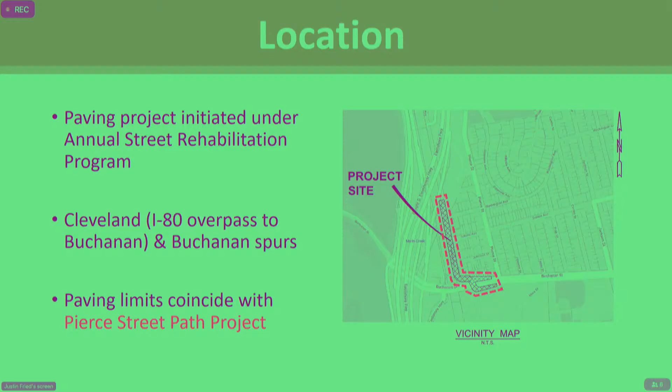In our active transportation plan, the Pierce Street Path was our highest priority, priority 0 project. The first segment, to the north or left on this slide, was constructed soon after completion of the plan.

Pierce Street Path Segment 2 continues along where the current path terminates, either along Pierce or through some Caltrans-owned right-of-way, through the parcel of land owned by the city that has Pierce Street Park in it, and then comes down to where the SAHA housing project, Verona Hill, constructed a segment last year, joining at Cleveland Avenue, where this project looks at continuing that connection down to the Buchanan Bikeway.

So it's all part of this Segment 2. It's been delivered opportunistically in these different segments.

This commission recommended we seek grant funding, and we have some planning and early design funding that was awarded to the city for the Pierce Cleveland Bikeway Connection project. That work will be kicking off shortly, and we'll be starting discussions around that with the commission.

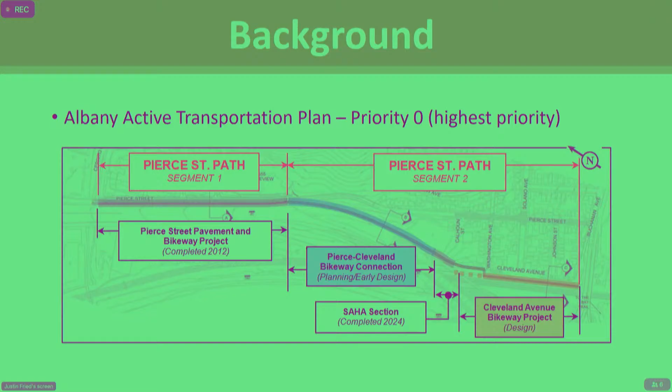This project is further along. This is the design phase and is programmed for construction.

So the meshing of these two projects together has happened in various ways, or these types of projects together have happened in various ways.

As I mentioned earlier, the annual street rehabilitation program really focuses on street condition. It's not intended to be an enhancement or building of new facilities, major enhancements, and building of new facilities. So outside of the required ADA curb ramps and safety measures needed to maintain the existing street...

The funding for new facilities really does need to find outside sources of funding, whether that's outside the program or outside the city. So, as Justin mentioned, we've had various grant programs that we've been looking for funding for, and we're happy to say that we have...

$515K that we received from Alameda CTC earlier this year, intended for construction of the bikeway components of the project. This is to supplement the annual street rehabilitation program, and it's actually developed as a separate CIP project in our recent CIP update, in order for us to track the two projects together or separately, but ultimately they're getting delivered under one construction project.

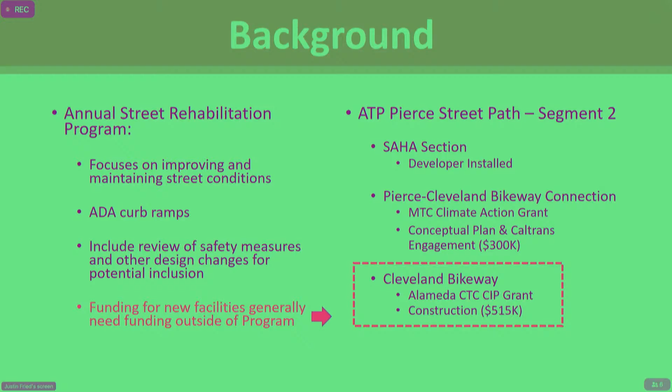So before diving into the project details, let's talk through our schedule on this project. For tonight, we're looking to finalize comments on draft plans. Often we come to you with slightly more developed plans, but it's been a few years, and we wanted to make sure we had a chance to run through everything. This is the first time we're showing detailed plans; I think the last time was more of a conceptual design of the bikeway specifically.

The reason we're doing this tonight is we usually end up spending a few different iterations, and we really wanted to see if, with this project, we could shorten that down, get all the comments at one time, and make sure it's complete.

We can vet through anything that comes in here before finalizing and sending it over to designers for detailed implementation. Right now, the plan is to return this coming summer for a recommendation to council, with hopefully council approving advertisement in the summer and fall, so we can start construction in winter of 2026.

This would mean it's following the Marin paving project, and we're trying to tie this closely so that we can continue to stay in a paving project of some sort, so we can keep up with our condition and pavement maintenance needs.

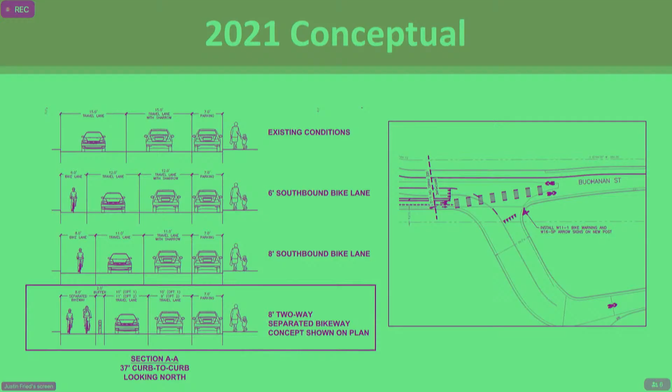Running quickly through some comments and follow-up items from the earlier conceptual discussion, there was a fair bit of discussion on the travel lane widths and the AC Transit service. At the time, the 80 route was suspended.

The route took from Pierce Street to Solano to Cleveland to get onto Buchanan. I think it was actually a holdover from before there was a signal at Pierce and Buchanan to navigate that left turn. Part of the discussion was maintaining an 11-foot width so that the 80 service could continue to run on that route.

With AC Transit realigned, the 80 was not reinstated. And as I mentioned, there is a signal now at Pierce and Buchanan, so if there was service brought back on Pierce needing to make the left onto Buchanan, presumably that would be an option. But at the end of it, it's really where the center line is, so it's not a huge project impact if there were changes down the road that need to be made to the lane widths. It doesn't really affect the rest of the design.

What you're seeing tonight maintains 10 feet in both directions, because we don't have the bus need, and we didn't have fire department support for going below 10 feet travel lane width, even in the northbound direction.

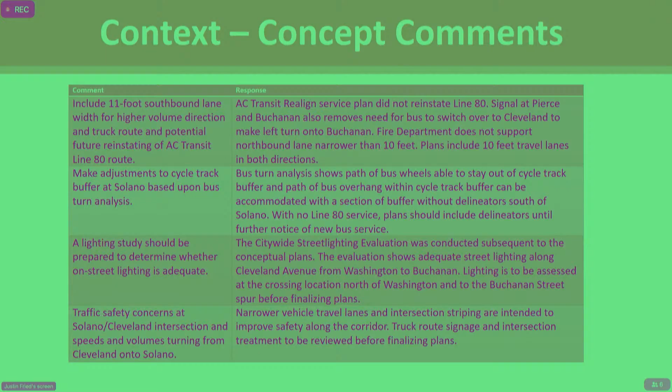All right, so I'm jumping in to provide a little bit more context on some of the civil design efforts that were identified coming out of the conceptual design process.

So the bikeway is located in what we call a major overland flow channel. It's taking significant overland flow from the side of Albany Hill, about a fifth of Albany Hill actually drains down through there. And so we wanted to make sure that the bikeway is usable even in wet weather.

Additionally, on the pedestrian sidewalks and ramps, we've had, with other projects, some drainage considerations that we wanted to implement here. So we took a look at all of these things, and what we're looking at is extending a storm drain up from the intersection of Cleveland and Buchanan, and bringing that through so we can take care of both an existing valley gutter that's going to make the curb ramp design very challenging along from Solano to Buchanan, as well as the bikeway. So some of that grant funding is supporting the bikeway components of the stormwater as well.

I think there's going to be a little bit more we can speak to a little later, but it really is trying to take care of the drainage. There's a visual. Thank you.

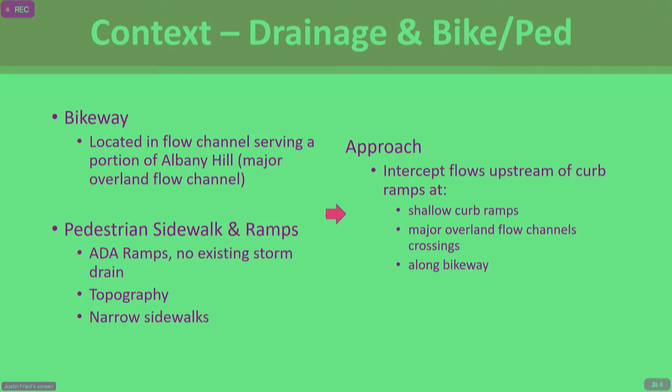So I think we're going to be diving into the current design. So the project as a whole right now includes paving, the bikeway improvements, RRFBs. These are kind of part of that bikeway design. We have curb ramps, storm drains, and striping and signage improvements.

Question: do you anticipate there being flooding? I mean, the water backing up when it goes into that inlet? That's always a maintenance concern.

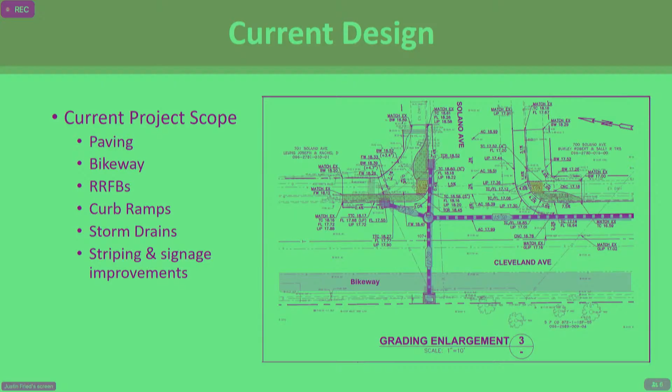So I'll run through a few of the elements in the design, and we can pull up the plans to go into greater detail for discussion.

The current design we're presenting, this is a cross section. It shows on the right-hand side, to the west, the 8-foot bikeway, 2-foot buffer, and then two 10-foot travel lanes and a 7-foot parking lane, and then the east side sidewalk zone, the sidewalk and planter strip. We're looking south here.

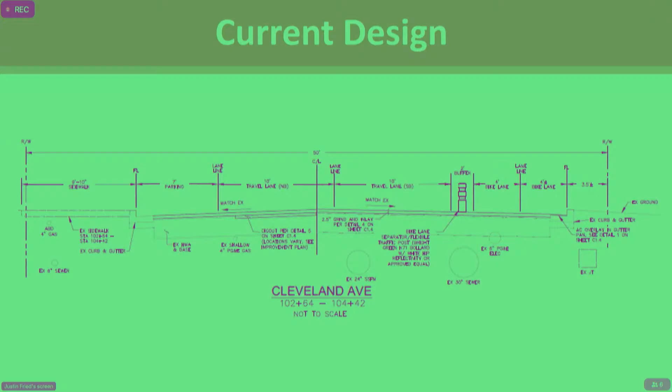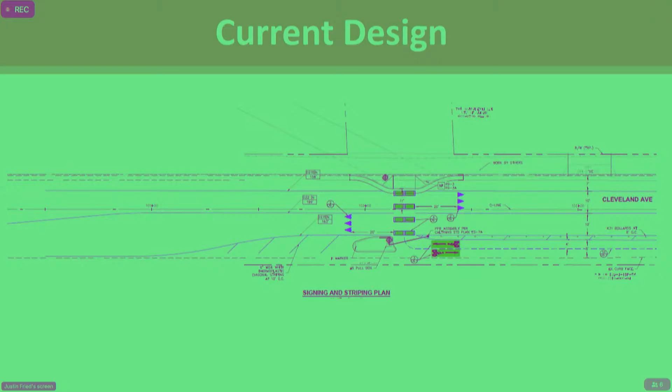And then just walking through some of the signing and striping plan pages. This is showing where the bikeway adjacent to Saha meets Cleveland. So we're looking at a curb extension and a physical island, raised curb island, as part of the lane shift for southbound vehicle traffic for the start of the bikeway, to really focus on slower speeds and attention to the crossing and making it as navigable a jog there for going from the path along the Saha property across and then into the bikeway adjacent to Cleveland here.

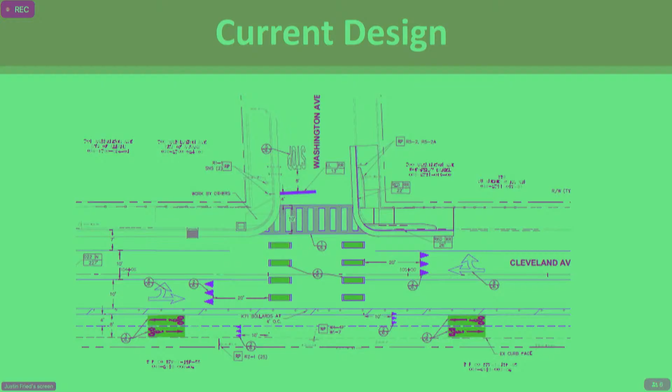And then as it comes to other cross streets, we're looking at facilitating entering and exiting the bikeway, as well as the curb ramp and pedestrian improvements adjacent to the paving. Similarly at Washington.

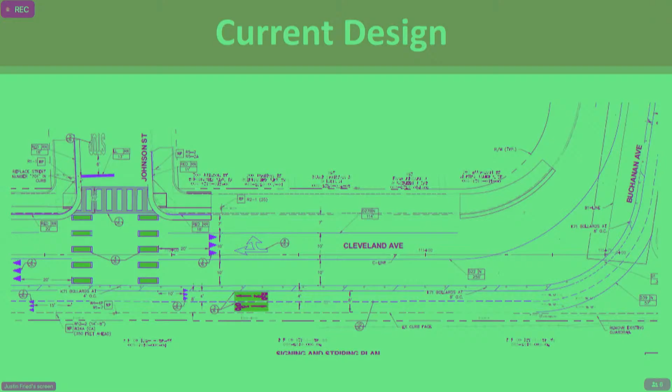Then south to Johnson Street, navigating the curve, and then here it needs to make the connection to where the Buchanan Bikeway crosses Pierce. There's access to the overcrossing, or crossing to continue east on the Buchanan Bikeway. East of here it's basically a dead end, low volume with just a few cars, but we occasionally get reports of folks not familiar with the change that was made, or not recognizing that isn't a street that continues. This is also showing a raised island that can be more prominent, since the main travel for southbound vehicles is really to continue under Buchanan, overcrossing to the signal, versus proceeding straight east here. With that, we can pull up the plans and speak to more specifics.

I don't know if you had anything else, Allison, before we open it up to questions from the commission. Yeah, I have a question.

On that same slide, did you guys consider putting a stop sign at, I guess, the northbound side of Buchanan Avenue, where the blue triangles currently are? Does that description make sense? Basically, where the truck traffic will be coming out. There's very little traffic coming north here, it's really just exit from the Department of Agriculture. It reads as a regular lane, but really that's the only folks that can exit there, serving one-way truck traffic southbound to East Buchanan Avenue. So we've been toying with ideas, and we're open to ideas on how to make sure it's a safe crossing.

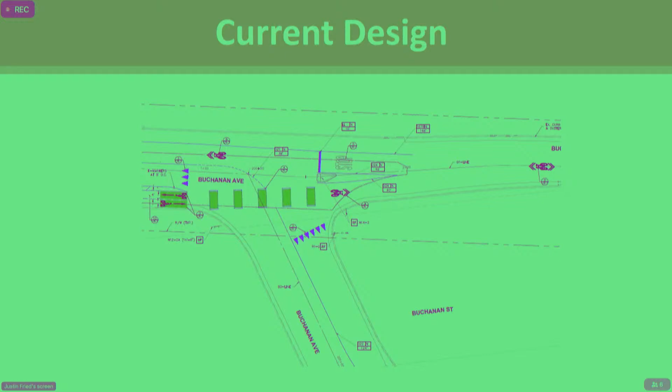I have a question on sheet C6.2, it's in your slideshow, showing the crossing at the north edge of the cycle track over to the property in front of Verana Hill, the low-income housing project. I'm wondering if that happens south of the garage or north of the garage? That happens north of the garage. North of the garage, okay, great. I looked at Street View, and it's still a grassy knoll. Oh, that sounds dangerous. There's nobody there.

I have a general question about the titling of things. This is described as a bikeway project, and there's some $0.5 million involved. Does that same amount of money apply for the pedestrian improvements, or is the bike funding exclusive to the bikeway?

So right now, the estimated project cost is about $1.5 million, and about $500,000, just over $500,000, was identified as related to the bikeway specifically. The pavement program, the annual street rehabilitation program, does incorporate ADA curb ramp improvements, and those are part of the paving program. They're required by ADA, and when we pave through intersections, we're required to make sure that the ramps are up to either the current standards, if they haven't been upgraded before, or if they've been updated in the past since passage of the ADA, that it met the ADA requirements at the time. Often those were less clear, so we often end up saying there's a better ramp that we can put out there.

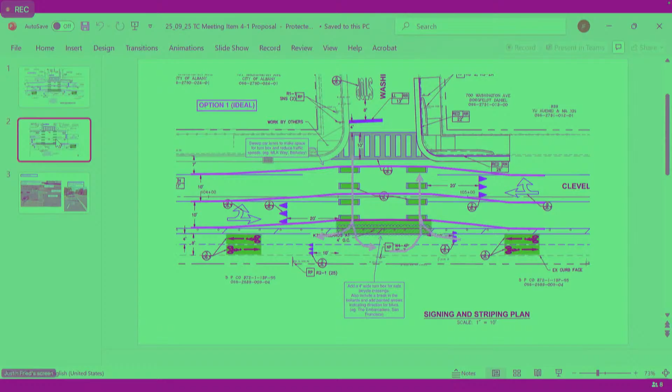Want to show the other images? Well, the other one was just in case no one took to the sweeping idea. It's less ideal because it's not as big of a turn lane and doesn't offer the benefits of traffic calming, but it's just kind of turning this section of the buffer zone into a mini turning shoulder kind of thing.

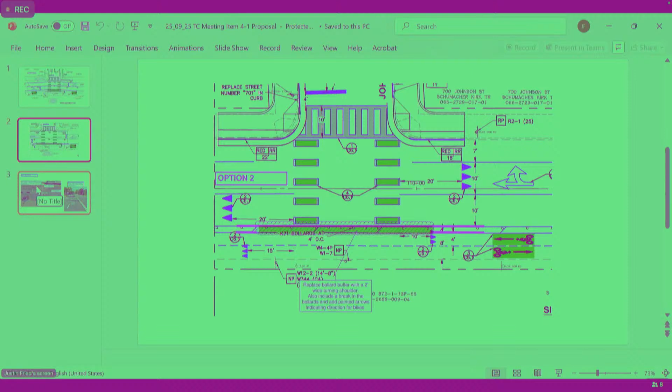And then these are just examples of where this is being done on the Embarcadero and Washington in San Francisco. We share the same cross street name, so that's a good sign. And then on the right is the sweeping on MLK in Berkeley.

So, Emma, do you mind speaking to some of the things she's brought up? I think we probably need some review. I did want to add one more thing about compliance around striping, because people tend to just drive right over striping rather than following it. Making sure that whatever improvements we're doing, is there room to make sure there's some kind of hardened element, or what we would need to ensure compliance with these kinds of lane movements.

Yeah, that's a great point. I did take a look at this before the meeting, and I do think it's a good idea. I would actually suggest reaching a little bit further and having a 6-foot wide turn box. I think we have the room to shift the striping over. But I do think this could be one potential idea we consider for navigating those right turns on and off the cycle track.

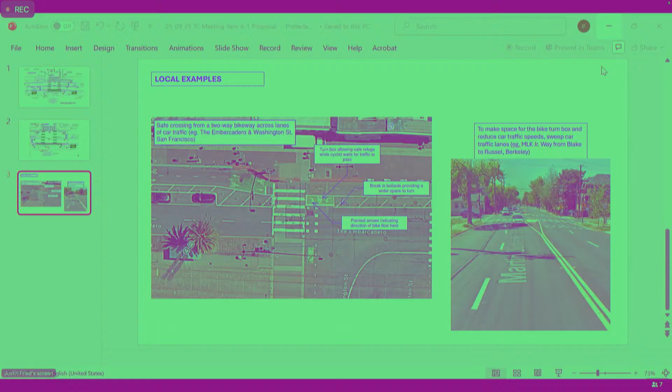Any other comments? I guess I just have one comment regarding Allison's proposal that's been outlined. The bikes coming down the hill there are going to be coming down at a pretty good clip, and they will be entering a crosswalk. I think the bollards to slow down the bicycles are a good idea, because there will be a tendency for people to walk off that crosswalk without necessarily hearing a bike coming down the hill at probably 15 or 20 miles an hour, or maybe more. But I would want pedestrians to be included in the thinking of how to make that safe.

I want to thank staff and consultants for the iterations we're seeing in the plans, especially the stop sign added on Buchanan and the island. I think that's a great solution for making that space a little more rational and supporting the crossing of cyclists there.

And I don't have a strong opinion about moving the traffic lanes, but I was struck by the fact that the green dashed cycle crossing sections kind of look like they're in the space where you'd expect a crosswalk. I think we want to separate those from the idea of a crosswalk. I would actually move them towards the center and perhaps have a bike logo and a directional arrow to reinforce that.

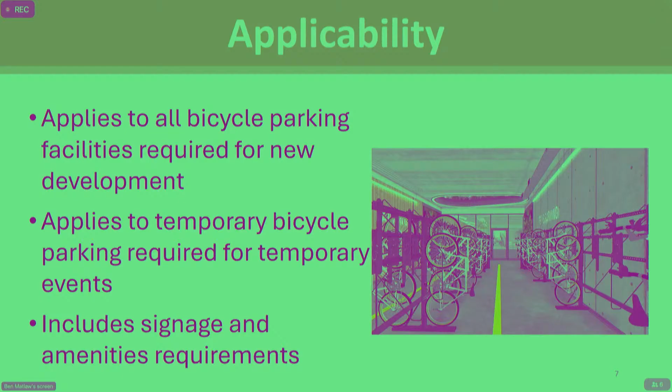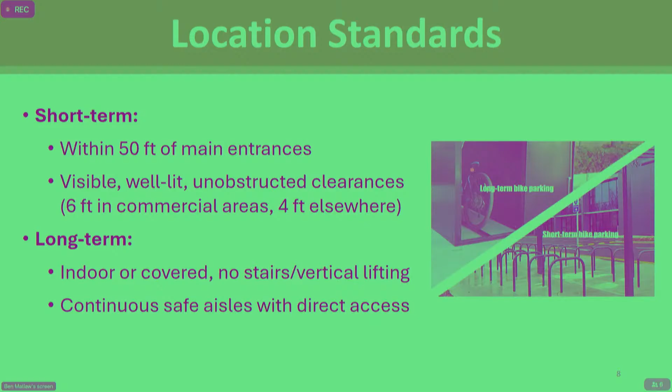In terms of location standards, getting into some of the details covered in the staff memo and the administrative regulations themselves: short-term parking required for private developments would have to be within 50 feet of main entrances of those new developments. They would have to be visible, well-lit, and unobstructed, with 6 feet of clearance in commercial areas and 4 feet elsewhere. For long-term bike parking, they would be indoor and covered with no stairs or vertical lifting, and have continuous safe aisles with direct access.

As you can imagine, there are a lot of different bike parking requirements out there, and different cities do it different ways. This is a consolidation of the best practices we could find. The standard bike parking space is 2 feet wide by 6 feet long, with 7 feet of vertical clearance, or 8 feet if it's a vertical or double-decker bike rack. Large parking spaces would be 3 by 10 feet with no lifting required. Those spaces are about 20% of required spaces.

Is this just for long-term parking? This is long-term. And then a 5-foot minimum maneuvering aisle between the rows, and charging capable spaces would also have to fit both standard and large bicycles. I need to remember what the percentage was, or if it was just a rough requirement—there needs to accommodate large bicycles as well as standard ones, but I'll fact check myself in a minute.

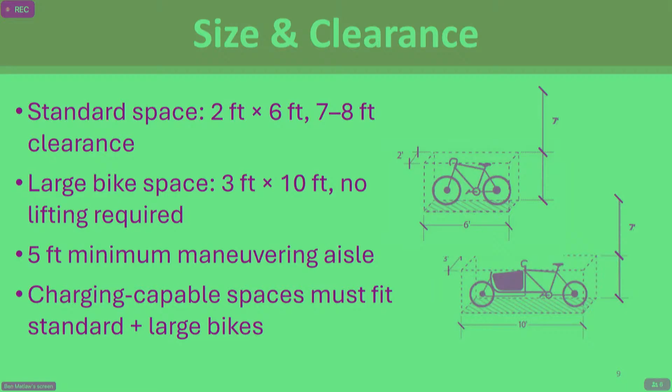In terms of design and materials, there were some recommendations in the administrative regulations recommending steel tubing and square steel tubing and corrosion resistant finishes—not requiring, but recommending—for both maintenance and security purposes. Short-term racks would be at ground level with minimal lifting, and long-term racks would be in covered or indoor facilities and weather protected.

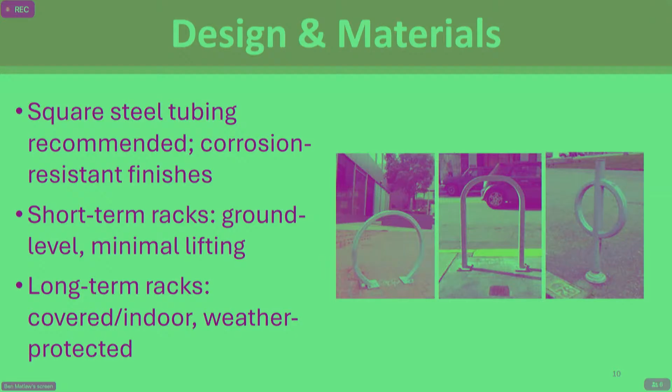Going back to security, all racks would have to be anchored with 2 points of contact for the bikes at the racks, and be U-lock compatible. They would have to be in locked or authorized access areas. There was a concern about chain link fences not being secure, so for long-term parking secured by a chain link fence, they would be monitored at all times and well lit. Acceptable facilities include bike rooms, lockers, and closed structures.

Signage and visibility: facilities must be signed per MUTCD standards, which is the national standard for signage. E-bike charging spaces would have to be visibly marked so folks know where to put their e-bikes. And generally, signage should guide users to long-term bike parking facilities and make it easy to get there.

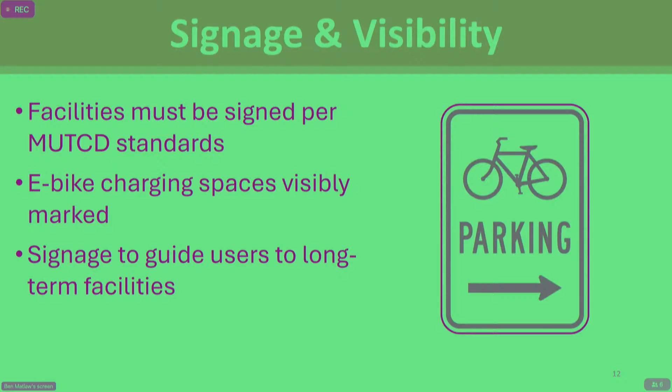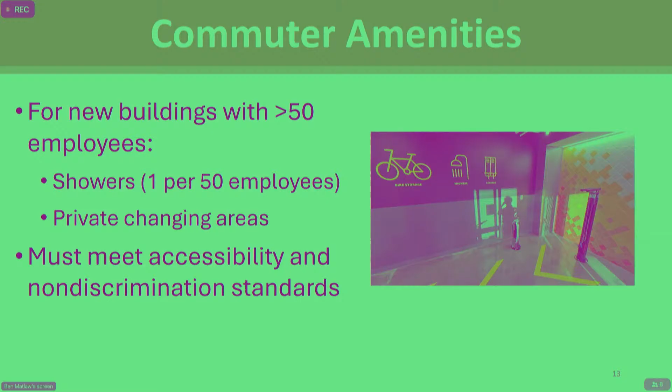Commuter amenities: there's a requirement for 1 shower per 50 employees for new businesses, plus private changing areas adjacent to those facilities, and meeting accessibility and non-discrimination standards, particularly as it pertains to sex and gender.

For temporary events, for each 1,000 attendees projected to attend at the same time, there would be 1 bike space per 100 attendees required as temporary bike space. These bike spaces would have to be within 1 block of the entrance of the event, monitored and free of charge to patrons, and the bike parking must be advertised in the marketing materials for the event.

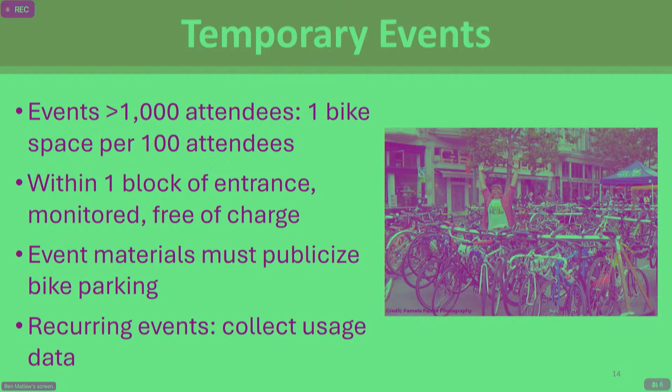If they're recurring events, there are some data collection requirements for the event organizers. And this goes without saying, but all bike parking and amenities would have to comply with ADA and accessibility standards.

So that's just a quick summary of what the administrative regulations touch upon. Kept it short and sweet. Hopefully you all had a chance to dig into them with a little more detail. In terms of next steps, we're looking for your feedback on the regulations tonight. These would be overseen and published by the Community Development Department and the director, and the regulations will be periodically updated to reflect best practices.

I should note that part of the reason we went to City Council before bringing them to the Transportation Commission was because of state law AB 306, which prohibits local jurisdictions from making changes to state building codes, CALGreen being our state building code, between 2025 and 2031, and if it affects residential changes, there's some legal ambiguity there. We wanted to get the ordinance passed through City Council before October 1st, 2025, which was the deadline, so we could make sure it was approved.